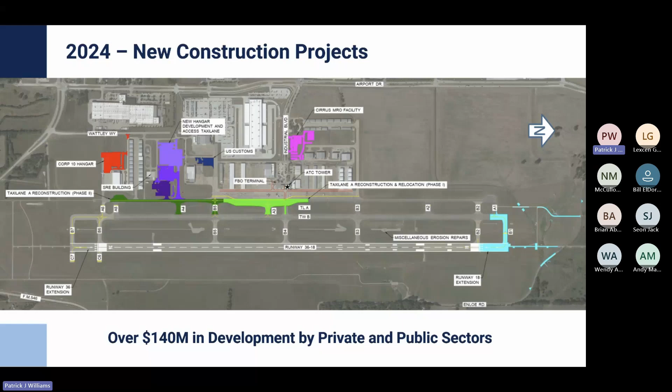The Cirrus MRO is a maintenance repair overhaul shop. I think there's three or four of these in the U.S. right now. It's a private development - again, we leased them the ground. They're coming in with about a $14.5 million project on 3.6 acres. They're actually at the airport today; we leased them a whole hangar to get their business up and running. They've been there for a few years now, and it's been very successful, but they're really just running out of space.

So this facility will allow them to grow that operation uninhibited, and it will also bring a hangar back into our portfolio that we need to lease out to other tenants. So, pretty good project, it's getting near the end. I think they'll probably have a certificate of occupancy this fall, and they'll be moving their operation in there.

This is maintaining a fleet of 2 aircraft that they manufacture. They manufacture the most successful single-engine piston aircraft in the country today, the Cirrus SR-22. They also build a relatively newer airframe, a Vision Jet, which is a very light jet, or VLJ. It's a single-engine, 5-passenger airplane. In terms of new jets, they're relatively inexpensive, around $4 million.

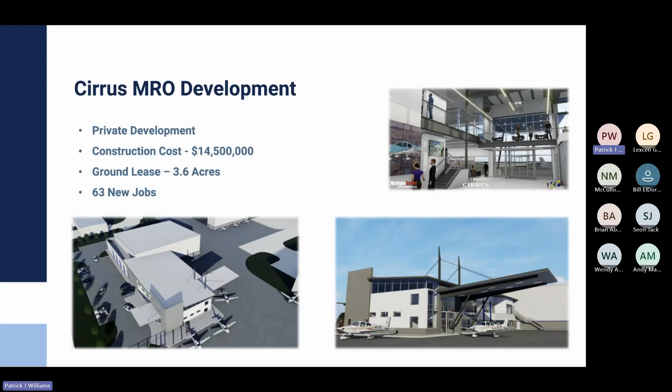But it meets a market segment that no one else is in. It's been highly successful, and when they were looking at locations, they came to McKinney. There was a lot of interest in being here because a lot of their fleet is owned within about a 500 nautical mile radius of the airport, so they saw it as a good location for owners to come and bring their aircraft for maintenance.

With that, I'm going to turn it over to Mitchell and let him talk more specifically about a couple of construction projects that are currently underway.

All right, thank you, Ken. I guess real quick, he gave me somewhat of an introduction of engineering background, so I'll clear that up right now. For Garver, I'm Garver's Aviation Texas leader, for anything across the state of Texas with just an aviation focus. That's my background. I may look young, but I've been doing it for 17 years now at this point. Loved every bit of it, and really just been focused on aviation itself.

So here at McKinney, this project, Ken actually mentioned it was that middle purplish hangar he was pointing out to. This is Encore Wire's new hangar, with a partnership with the city on developing that taxi lane that you saw. What you're seeing here, the reason why this project's really interesting, is that every project we all go through change orders, change requests that always come at the worst possible time, and you want to be able to plan for it in advance, especially when you're dealing with the private sector.

It's a little bit more challenging because on the public sector, it's usually a process that can be strung out over time, and you can eventually come to resolution over several months. In this instance, the existing fleet for Encore Wire was a smaller Gulfstream 280, which, as you can tell, this is a fairly large hangar. The reason why is at the time they were looking at expanding their fleet.

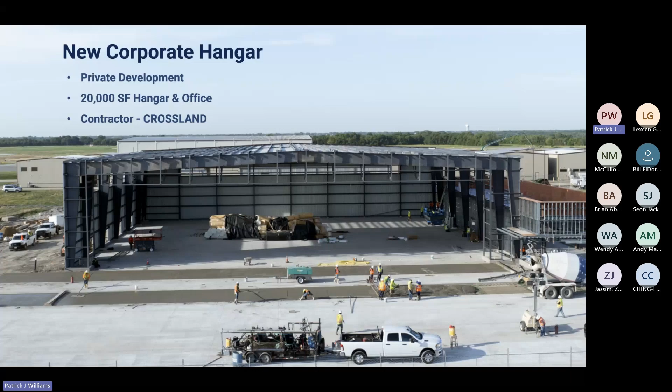So I think we can all agree the private world versus public world, change requests go in a much different fashion. This is a great example where these people had the forethought to think long-term — hey, let's not just look at our now operations, let's look 10, 15 years down the line. May seem ridiculous, but now they look like geniuses, because they built this facility for something that's going to happen here in the next 9 months, not 15 years. This was strictly a private development project with Crossland as the contractor.

Ken mentioned the 40,000 square foot hangar for the FBO. What's interesting about this project, and he mentioned Customs, is that it's actually a P3, a public-private partnership between the city and the private developer, GriffinSwinerton.

What the developer did is take this 40,000 square foot hangar and combine it with the Customs facility. The revenue the city generates from leasing out the hangar actually supported building a new Customs facility, because Customs facilities are not cheap. They are very expensive little facilities that on their own are a challenging project to undertake.

For this facility, the clear span for the doors is 220 feet in length. That's a fairly large opening, and the doors have a 28-foot door height. It's a pretty extensive project. The hangar alone is about $12 million, and the contractor is Swinerton.

So I mentioned that Customs facility. Yes, that's only a 3,500 square foot facility for $6 million. If you look at the price per square foot, that's over $1,700 a square foot. And you're wondering, what is that getting me?

What that's getting you is effectively, you have to treat this almost like a federal installation, where if Customs and Border Protection or even the FBI need to use it, you have to have actual penal grade detention facilities inside this building. So if the federal government has a passenger that needs to be detained, it has to still be in a facility that meets all the requirements from FBI, DHS, everything. That means you have these block walls with reinforcement and concrete inside them.

You'll see drywall throughout it, but if you've ever done a federal installation, it's not just drywall on the exterior. There's a steel cage behind that drywall on all those facilities, so if someone tried to punch through a wall, they're going to punch a steel cage. It's another facet of trying to make this a penal grade facility.

What's interesting about McKinney is I think a lot of you probably have Global Entry. What they want to do is take that, not just at DFW, but give another facility for people to drive to and do their appointment for Global Entry. They wanted all this additional equipment because they want to be able to serve the public on the land side, so anybody in this room can just go in, do your DHS appointment, and get your Global Entry.

So you had to balance both sides, a penal grade facility versus making it appealing to the general public, because no one in this room wants to go to a jail to do their interview for Customs and Border Protection. But it's a very unique project in itself, and again, this was part of that P3 development with GriffinSwinerton, with Swinerton as the contractor.

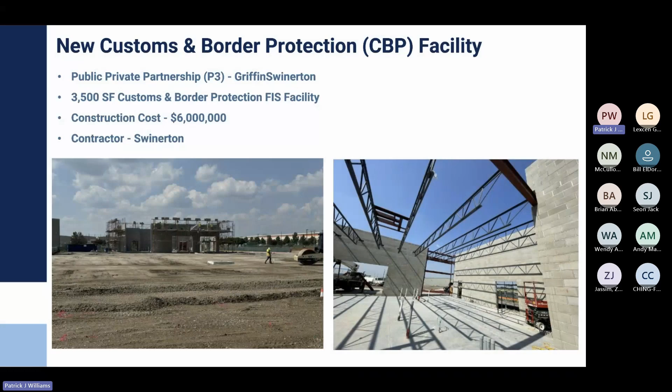As engineers in the room, we can all agree, wow, that's a pretty major undertaking. The general public's like, that's all you got? It's 500 feet of pavement, not realizing a lot of that $12 million cost was in earthwork and soil mitigation. The concrete itself was maybe a 1.5 month portion of the entire 10-month project. So the south end looks very simple, 500 feet, but it ended up being a bigger challenge in the full grand scheme of things.

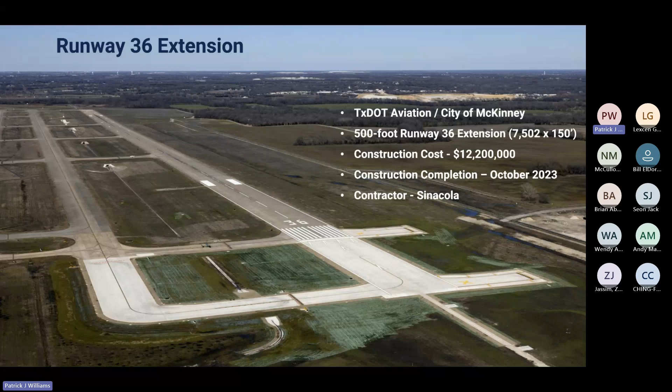And then we flipped to the north end. This project actually opened bids last Thursday, and it's in bid review. On the north end, if you're familiar with McKinney, you have the east fork of the Trinity River. Anytime you're extending pavement into a floodplain, that's always going to have some unique challenges in itself.

So there's a lot of different lines going on there. If you're not familiar with aviation, that's probably a little overwhelming, but those are the different things we have to protect for the airport to operate efficiently. This runway extension will take 2 years to complete, and you're about to see why—the runway will be 8,000 feet in length. If you think about the Metroplex, DFW has the large runways, Alliance has the next longest runway in the region, and McKinney will be up there as that fourth airport able to support that traffic for this project. So you can see the extension.

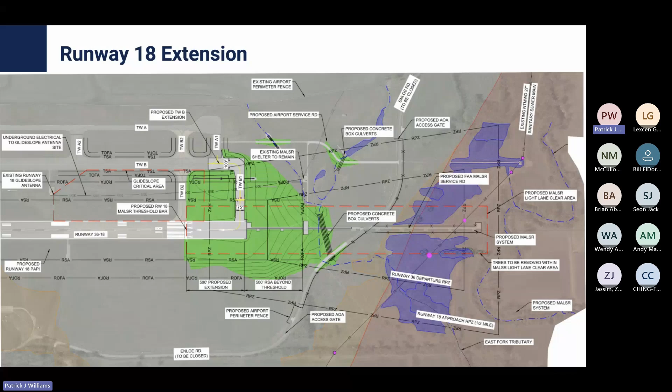Here's the profile, here's your engineering for the day. It's a bit misleading, but this is really a 20 to 25 foot embankment going up on that north end. We're navigating floodplains, wetlands, things of that nature. Right off the bat, we're talking about PIs in the soil that were in the 60s. So what happens when you put a lot of bearing pressure on existing soil, and you're talking about 25 feet of it—it's just going to settle.

Well, how do we mitigate that? One of the things they're looking at, you'll see on the screen, is wick drain installation. We're having the contractor consider other alternatives too—stone columns, wick drains, you name it. We're open to it, but we're trying to reduce the settlement period that would occur with all that weight of soil on that poor soil we're dealing with. As that weight hits the existing soil, it's going to squeeze out all that water, and eventually it'll go into the collection system to get it off the airfield.

These vertical lines you see on the screen are what's called a medium approach lighting system and rail. For an aircraft landing, there are conditions where if they can see the runway environment, they can land—that's the strobe light. If you ever drive by an airport and see the strobes, that's effectively what that is.

Since we're in the floodplain, we're having to add structural elements to support the extension and not be a problem within the East Fork Trinity River. But just by adding 500 feet, the whole program is a $30 million project. And when you're talking about settlement periods that could be anywhere from 6 to 15 months, that's a huge variability we're hoping to mitigate by using wick drains or stone columns. We're going to see what the market proposes to help reduce that time.

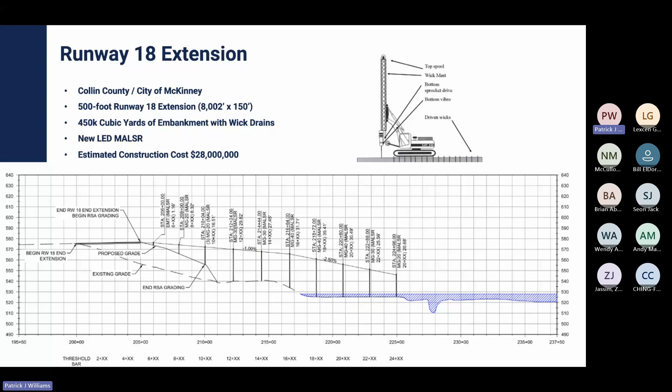So with that, I'm sure a lot of y'all are here to understand where McKinney is going, so I'll gladly pass it over to Ken to share where the airport's heading.

Yeah, so McKinney's been in the news a little bit recently and over the last couple of years on various stages of this initiative that we have to transition to a commercial service airport, or an airport that would have scheduled air carriers operating.

So today it's all general aviation, and it's pretty much everything except that: corporate, private, recreational, a little bit of military use, law enforcement, medical transport, all of that kind of stuff.

But this initiative started several years ago, and really what started it was airlines reaching out to us, the airport, the city, unsolicited, asking about being able to operate out of there and what it would take.

I've worked at a couple commercial service airports, and they're not cheap to run. I knew it would increase the airport's operating costs, but then there's also a lot of potential benefit to it, not only in terms of economic impacts, but other revenue streams for the airport too.

So we started a fairly detailed analysis back in late 2019, 2020 to really just look at the viability of the market, talk to a lot of different airlines, have a market analysis done by a competent firm that looked at a lot of detail about the region, the demand, the location of other airports, the proximity of growth in North Texas, and all of those kind of things.

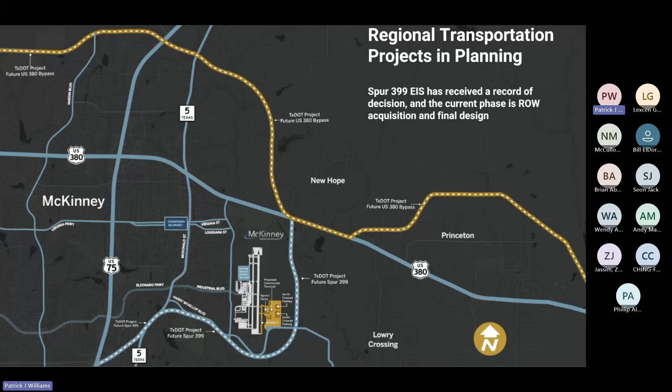As Ken mentioned, with the Spur 399 project, that's this gray line that goes around the south end, the left side of the screen, and comes parallel to the east side. From the city standpoint, everything that's not shaded is what the city of McKinney owns. The east side for more development on the airport - the city doesn't own any of that property. From a development standpoint, they're getting severely restricted on what's available, down to 11 acres, and from an aeronautical development standpoint, that could be gone in the next couple of years. At that point, the airport is effectively just waiting for that next opportunity. That next opportunity being proposed is Spur 399, which will be part of the catalyst to ultimately develop on that east side.

You'll also notice plans for future roadways coming off that spur that will serve the airport. Everyone's seeing that in the market - you're starting to see land go for sale on that side of the airport. Developers are already seeing the potential of that, especially for McKinney's sake.

What you're seeing here on the screen - sorry if I'm repeating myself - was the original ultimate vision of what commercial service would look like on that side of the airport. When the bond failed, we had to scale that back and look more at a proof of concept. The original vision was an initial 4-gate terminal, with the master planning aspect going up to 16 gates. Think about it - Love Field has 20. That's a lot of operations occurring out of the airfield.